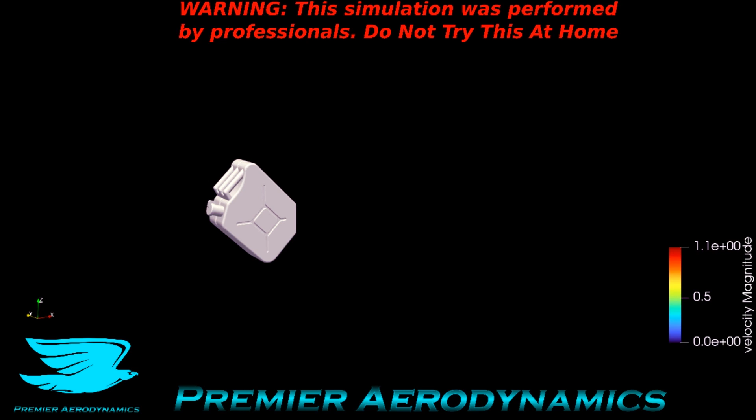What is up, amigos? Today we have the aerodynamics of a jerry can.

Growing up, these were the type of cans for gasoline that I saw all the time. Even today, if I see one of these cans, I pretty much immediately know there's going to be gas in there, although maybe I need to take off the top and check inside to see. But I have a good idea there's probably gas in there. It's the type of can that would have gas, and they usually come in green. I've seen them sometimes in brown, but I've never seen them in blue.

So we have the aerodynamics here with different cut planes downstream. I've put the jerry can at an angle, like you were pouring some gas out, and this has made the wake really interesting. You have pretty much two lobes forming, one at the top, one at the bottom, and in the middle of the wake there's this truncation.

Why does that happen? The reason is because from the top corner and the bottom corner, the flow hits the jerry can at the front, then separates on the edges. It doesn't have time to reattach because as soon as it tries, it's already past the jerry can, and now we have a big wake.

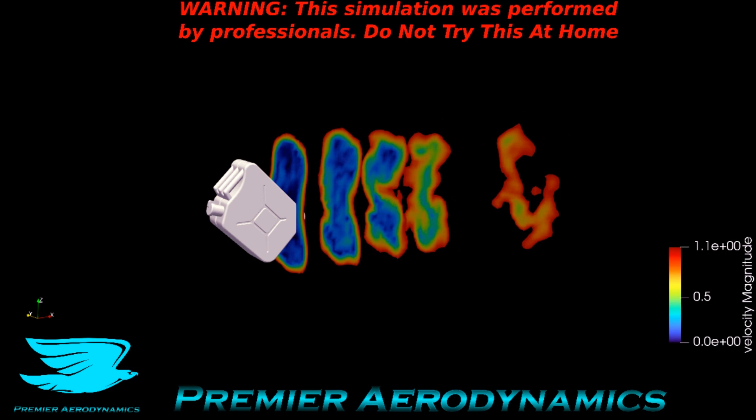Around the middle of the jerry can, if we go in the free stream direction horizontally, the flow will separate around the edges, but then start to reattach on the jerry can before it hits the back. This allows the can to be a little more streamlined, which is why we get this cool truncation shape.

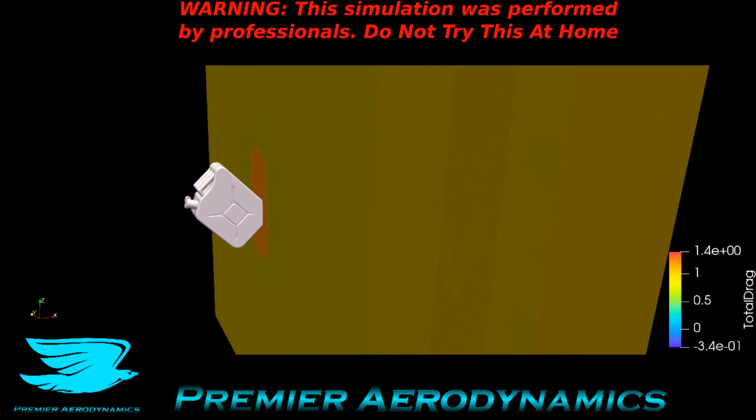The truncation is quite varied, moving around a lot, which indicates this jerry can is very bluff. These are the exact same planes, but now with a total drag, and we can see just how draggy this jerry can is. We have a lot of drag very close to the jerry can, but it dies out fairly quickly as we go downstream. That indicates a fairly bluff body, but because of that middle section, the wake dies out much quicker than it might if we had the jerry can upright.

I can tell you the drag coefficient of this is 0.52, so it's not too bad. I think it's better because we have it at an angle. If it was upright, it would probably be a bit higher.

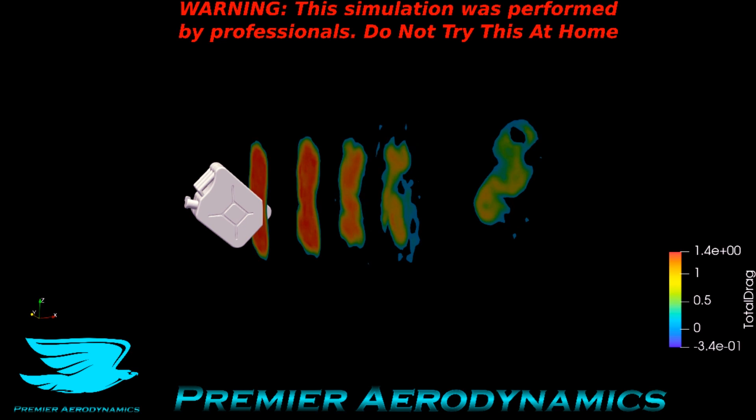We have a Y plane now, which is just on the edge of the jerry can, not hitting it, just stationed off a little bit. This shows exactly what I was saying before: on the top corner and bottom corner, you have this wake forming, because the flow does not have time to reattach before it hits the end of the jerry can. In the middle part, it does have time, which is why we get a smaller wake there.

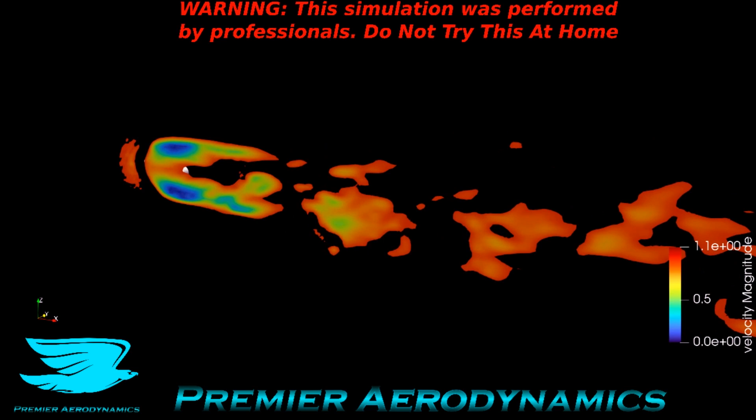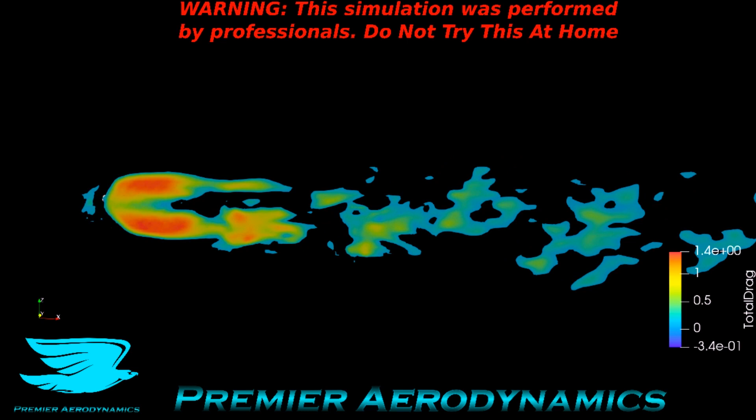This is the exact same plane now with a total drag, and it confirms what we think: the top and bottom are where most of the drag comes from. We can see these drag production areas here. The bottom part is a bit more draggy than the top, and that's because it's not nearly as varied. The top part, if you remember the geometry, had the nozzle, then the handles, then the top edge. That was a bit more varied, indicating more turbulence there, which helps keep the flow a bit more attached, and it's not as bluff or blunt, so we don't get as much drag from the top as the bottom.

Now we have a Y plane going through the middle of the jerry can. Two things stand out to me: first, the wake is really big as you'd expect, it really just flares out. That's because there's redirection of the flow in these areas, and it has to hit the free stream and then straighten up more.

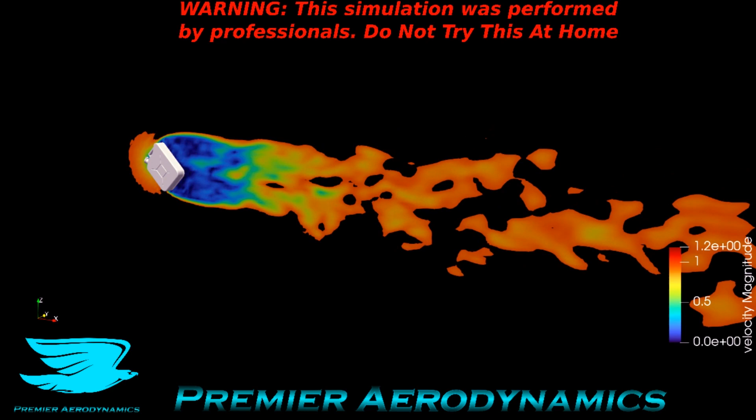The second thing that strikes me is that there is not a lot of flow recirculation behind the jerry can. Most of the flow is fairly still, linear, goes downstream fairly quickly. I think that's because the jerry can is fairly thin. So because it's thin, the flow from the free stream areas entrains the flow more downstream, helping it stay streamlined as opposed to recirculating around like if you had a sphere, for example.

And even though we didn't have as much recirculation as we might have with other bluff bodies, the drag production is still very high. As I mentioned, the drag coefficient is 0.52. Also, the lift coefficient was not that much, it was 0.05, which indicates there is a little bit of lift being produced, but not too much.

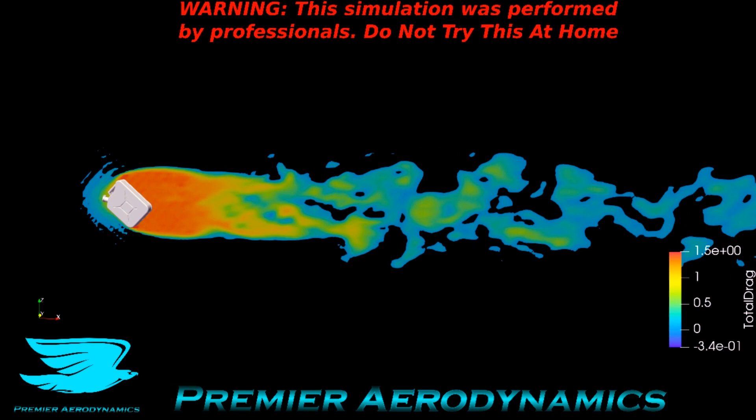That's probably because of the asymmetry in the jerry can's geometry, it's turned down a little bit. If I were to turn this 90 degrees more, I imagine that might be producing a little bit of downforce. Instead, you get the opposite thing happening. This is a Z-plane below the jerry can, so it's not even hitting the jerry can yet.

It's pretty cool, we can still see the wake because it's so big it flares out so much. But interestingly, there is a two-dimensional periodicity to it. Left and right, you can see as time progresses, it sheds one side then the other, and so on. Now that's interesting because I would expect a bit more of a three-dimensional effect from the jerry can, since we're right on the edge, even further from the edge than that, so I would have thought there'd be some three-dimensionality.

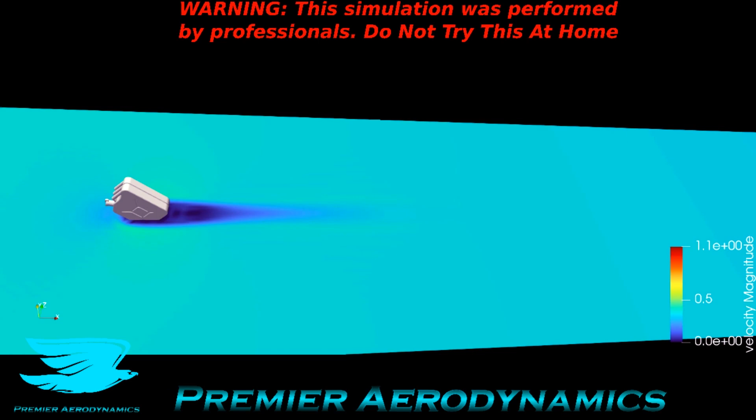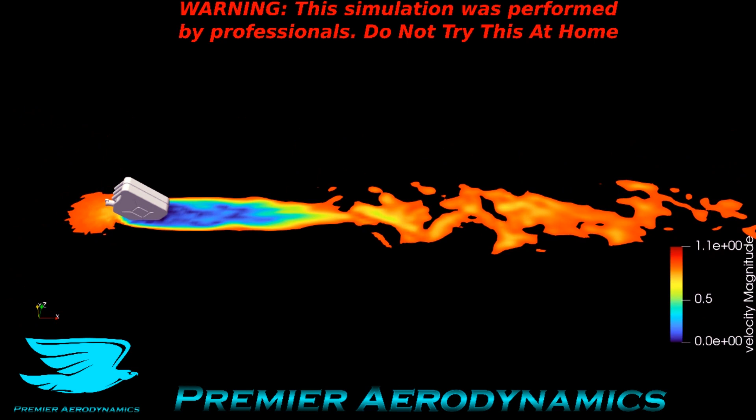But it seems like the two-dimensional periodic shedding is dominating the flow. So this Z plane is a little bit higher now, it's now hitting the jerry can, about 1/4 up. We can see that this area is really where most of the damage is occurring, I think. We have a big wake. It's three-dimensional because the two-dimensional fluctuation is not nearly as crisp as it should be. That indicates there is three-dimensionality coming off from that corner, which is interesting because the plane we saw just before, which is lower, didn't have that three-dimensionalness. It had only the two-dimensional side to it. So we had to go closer to the jerry can for that three-dimensional aspect to take play.

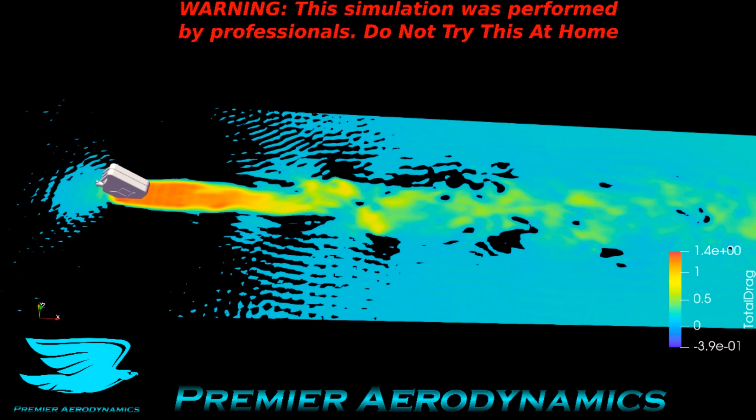The total drag shows that there's just a lot of drag coming off of this plane at the moment. Even if you go upstream, just at the edges of the front of the jerry can, look at how much it flares out, and you're getting drag being produced already from there, which is not a good idea. You want to delay drag being produced as much as possible to reduce the drag, but obviously it doesn't happen here because jerry cans are not that aerodynamic, generally speaking.

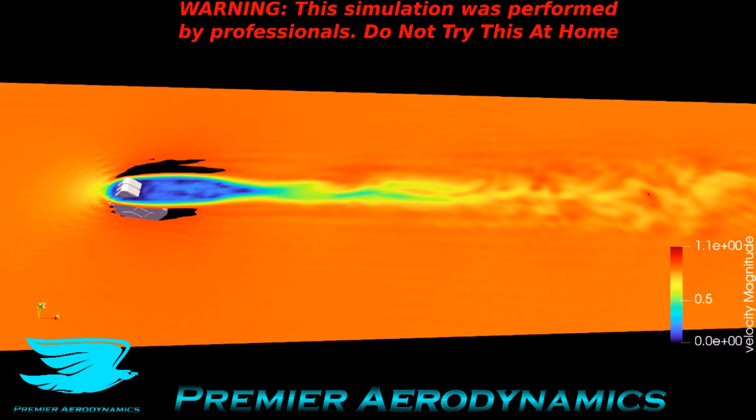So this plane is now going through the handles and just above the nozzle. We can see the handles, I think, do make a big difference because the wake is a little bit smaller and more two-dimensional than the other plane we saw further down on the jerry can. So I think the handles are helping stabilize the flow a little bit more.

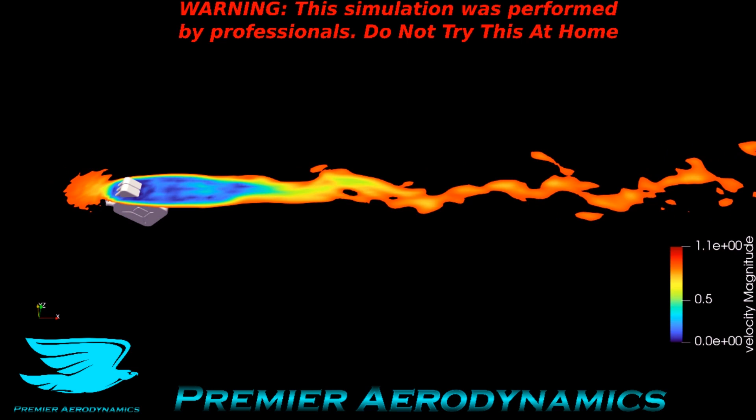And why would that be? Partly because the flow can be redirected a little bit better, it doesn't have to get redirected all at once, it can take more time to do that. Secondly, there's some vorticity coming off of these handles which helps re-energize the flow a little bit, perhaps, and help it stay attached a little more, or at least not separate nearly as violently.

So even though we had a smaller wake, we still have quite a bit of drag coming off here, and a way to reduce this drag is to potentially streamline the corners a little more, so chamfer them and potentially round them a bit more, and we could reduce the drag there. So that's this video.